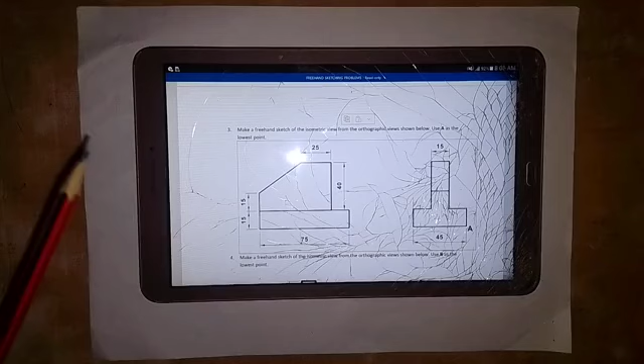Welcome to my channel. Here we are going to work on the making of an isometric view of this object, freehand sketch. Okay, so these views are given in first angle projection. This is the front elevation and this is the end elevation, and we have the lowest point here.

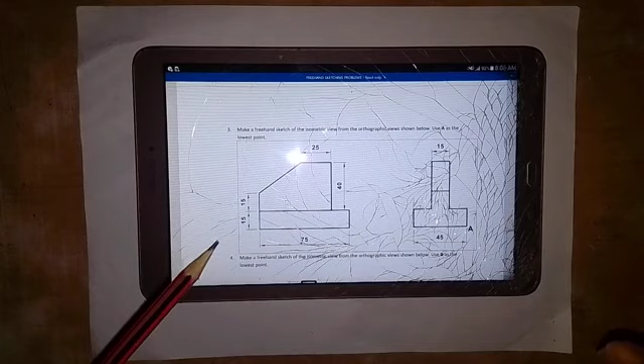As I said in another video, when you are given orthographic views, whether you're asked to sketch or you're asked to make use of instruments to produce the isometric view of the object, take note of the main part of the object. So for this object, this is the main part. This end elevation is the main part.

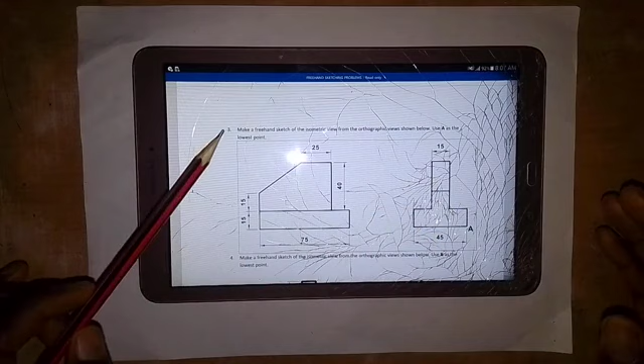So first of all, sketch this shape, okay? Then we go on and add other parts to it and sketch its isometric view. So let's go and see how this can be done. So do not forget, we have the lowest point here.

All right, so the first thing that we are going to do is to make a short horizontal line. As I said, we are not to tape our paper in freehand sketching, so make a sketch of a short horizontal line in this direction. Okay, so this point, I just put a dot here. So this is the lowest point A, so I will write A at this point. Always indicate the lowest point.

Then the next thing that I'm going to do is sketch a line in this direction, at an angle of 30 degrees. Though we are not making use of a protractor or a set square to get that angle, always take note of the length of the object as given in the drawing. So we take note of that and we sketch a line equal to that, almost equal to that line, or a bit more than it.

Okay, so at this point I will sketch a short vertical line like this, and I'll come to this point here. So looking at this distance, I will also sketch a short vertical line here like this, and then I'm going to draw a line in this direction. First of all, close them together like this. All right, so I have this line.

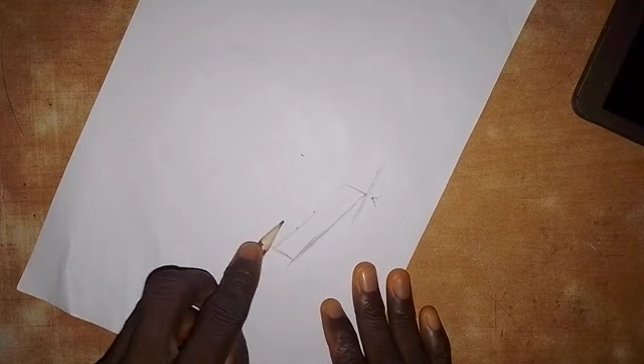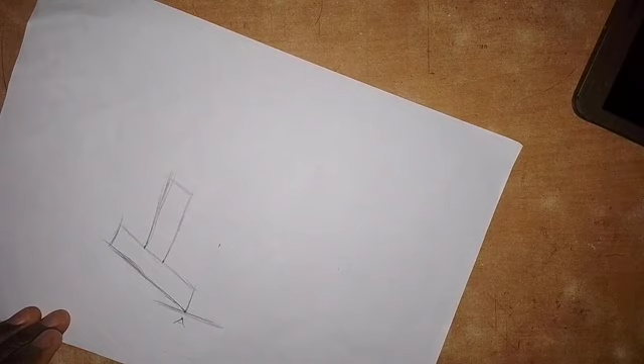Okay, so in the middle of this, maybe somewhere around here, and we also have a point here like this. I'm going to make a sketch of a vertical line here like this. This is freehand sketching, so make a sketch of a vertical line like this. Let me stop it there. Then I will connect this together like this. You can see how I have done it. So now we have produced the main shape that I talked about.

So now the next thing that we are going to do is to draw a line in this direction from this point, from this point, from this point, and also from this point. So I will make a sketch of a line from that point in this direction. I believe you can see it. So it goes like this, and also I will make a sketch of a line in this direction.

Okay, so if you look at the front elevation, we have a rectangle in the front elevation. Then we have a part standing in the middle of the whole shape. So from this point I make a sketch of a line in this direction like this. Coming to this point also, I make a sketch of a line in this direction, and this point also. Then at this point I will sketch a short line. This short line will touch this one, so we stop it there like that.

Okay, so do not forget that the lines should be parallel to each other, as we have here. Then make sure you are considering the given dimensions. Then I'm going to terminate this one by making a sketch of a vertical line parallel to this. The line goes like this, so we have this line. Then I'm going to join this point with this.

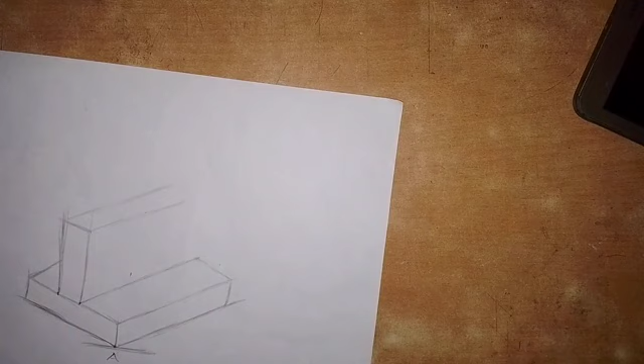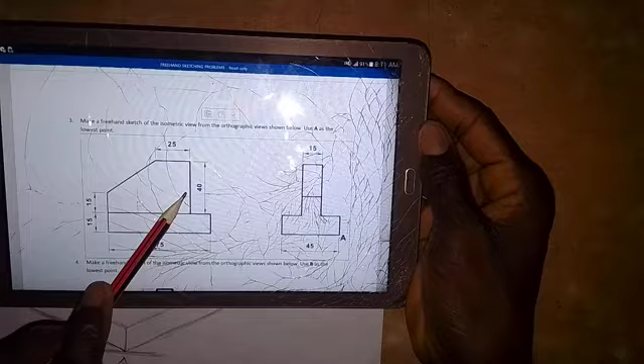Let me bring the orthographic views of the object. So if you look at what we have here, this is how we see it in the front elevation. You see that there is a little space, so it didn't reach the end here. There's a little space between the end of this part and the end of this rectangle as we have here.

So what we are going to do now is terminate this one somewhere around here by making a vertical line. So we sketch the vertical line like this, and make sure that it is parallel to this one. Then I will take it from here to this side like this. All right, we have not completed it, because we have a part that is slanting. Let me erase this excess line.

All right, so the next thing is that we have a slant part here. First of all, I will make a line that will be parallel to this line. So make a line here, and I'll come somewhere around here. Make a line like this. I believe you can see it. Then I'm going to connect these 2 points together like this, and then connect these 2 points together. So we have it here like this.

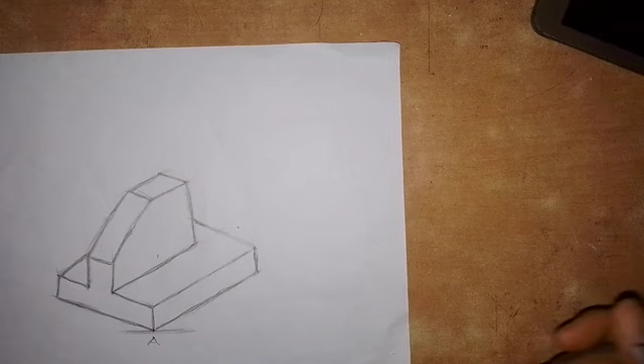So I'm going to erase the lines that we do not need. I will pause the video and do that. All right, so here is the object as we have made a sketch of it, as simple as I've done it. So all you have to do is follow my instructions and do it like that.